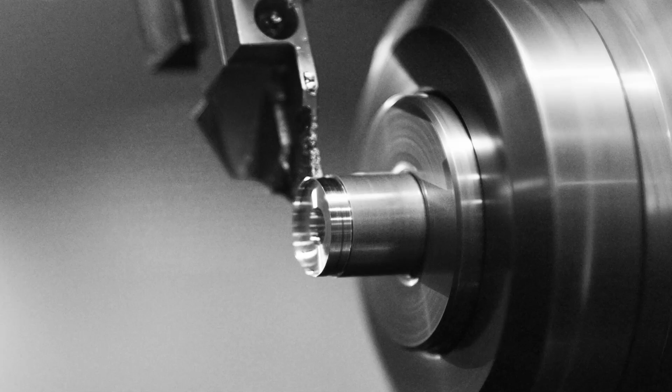Automation and digital thread. We're here with Hexagon to find out more about these key concepts and how they can help improve productivity within your organisation. So Matt, let's start with automation.

Thanks, Lindsay. I think automation is obviously a key critical term within the industry a lot at the moment, and what we often get asked by customers is what principles we really need to understand to adopt this properly. So what we've tried to do is break this down into a series of key overview ideas.

Hopefully people can adopt these to help them on that journey towards automation. In terms of these key considerations for automation, the first one we encourage everybody to think about is streamlining repetition. What are the labour-hungry elements of your process that you're wasting an awful lot of time on right now, where you're doing pretty much the same thing every time?

Now, when we talk about repetition, sometimes it might be in slightly different ways. So you want some kind of flexible automation that is going to take care of the 80% of your job that's causing you grief every day.

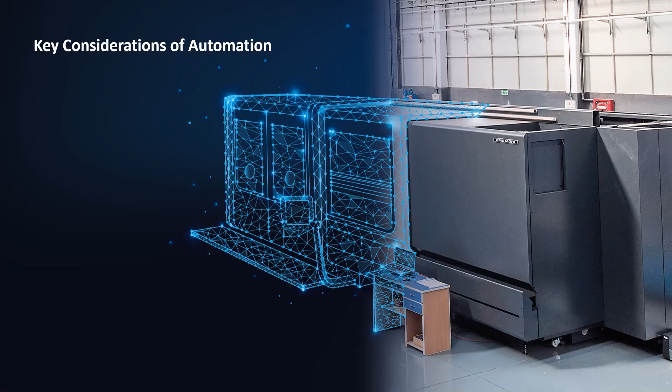Quite often we speak to people and they say, I'm concerned about automation, is it going to de-skill the job? Actually, our findings are completely opposite. Automation is about making the most of the key skills you have and applying them to the really complex concepts that you need that expertise for.

As a third point, I think this is a common concept and something that we often forget: short-term pain, long-term gain. You've got to be committed to putting in that work up front to deliver automation because you truly believe in what it's going to give you in the long term.

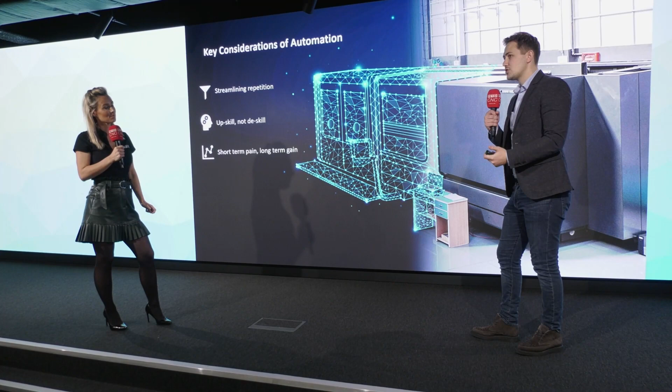If the first time you encounter a problem you slip back to your old methodology, the concepts of automation are not going to work for you. You've got to have a long-term vision of what you want to achieve.

Fourth, flexibility and agility. As we've spoken about previously, the world is becoming more nuanced and more heterogeneous, and people need to have greater agility to be able to adapt to a greater variability of scenarios.

So what's important with your automation is that it's not rigid. A rigid process is doomed to fail in the next phase of industrial revolution. So what you need is dynamic automation that can adapt to the scenario put in front of it and learn on the fly.

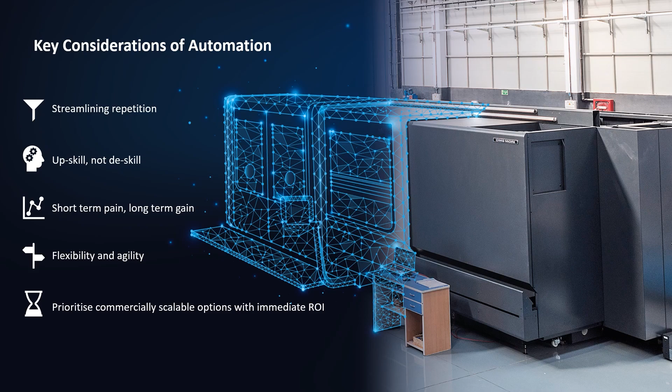And finally, I think this point will appeal to the CFOs out there. We've got to make sure that your automation is commercially scalable. What we mean by that is don't invest millions of pounds on a concept that might take 5 years to see any kind of payback.

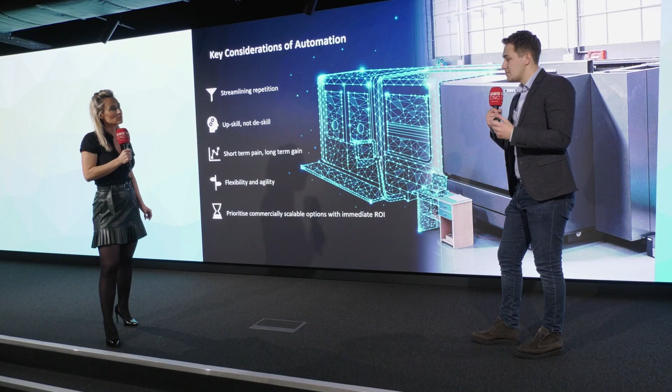What you want to be doing is picking on elements of the process that can obviously be connected together but can start paying back very, very quickly and scale up from there. It's great to share success stories within your business early, and if you can pick areas where you can deliver an element of automation and then scale from there, you're going to create a real good feeling within your business.

Right, next then, digital thread. Indeed. When we talk about the digital thread, there are two main phases to this.

I think the first thing we've got to really hammer home to people is that you must have a digital thread in place now. As we're heading into 2021, this is a real key, critical concept. And a phase one digital thread is something that every customer should have.

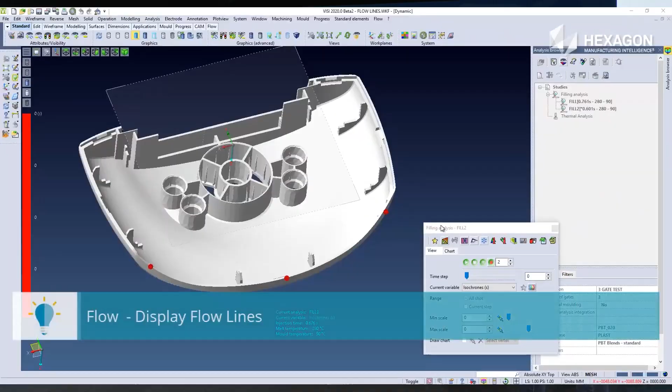So what you can see behind us is what we consider to be a production software digital thread for the mould and die industry. So our Visi CAD solution, which gives you full mould design functionality, polymer flow analysis. Our WORKNC CAM product, which is fantastic for 5-axis mould work. And finally, our NCSIMUL product for G-code simulation.

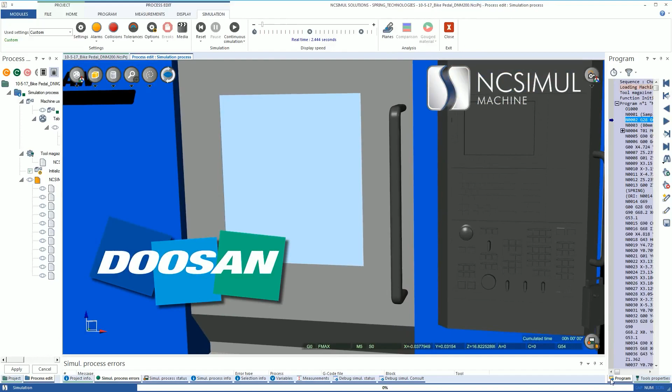Now, this is what we would call a traditional linear digital thread. This is something all customers should have in place already, regardless of their vendor, where you've got a clear process for your data to flow through, so there's no breaks in the chain. From the moment you take CAD data to your finished component, you've got this clear digital line running throughout your business, which creates greater continuity in your data, easier automation, and just a cleaner process in the business.

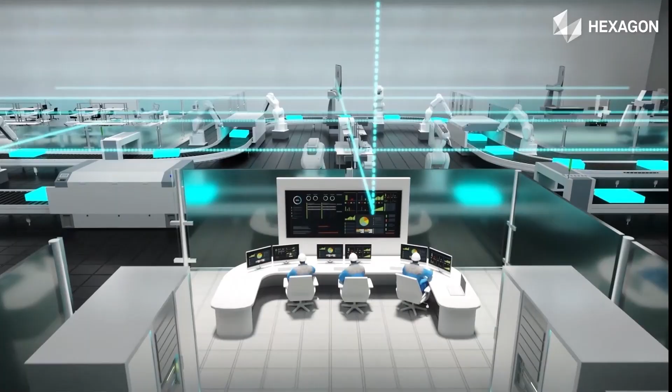However, what we are starting to see as time goes on is a real evolution of the understanding of digital thread. Our linear model, as we looked at before, can sometimes be misadopted by customers, and what we see is a rigidity of process where people take on a concept that lodges them into a fixed process, and then they have no agility. As we've talked about before, the customer is becoming more demanding in the nuances they want from you. So what's really important is that you evolve your digital thread into a 360-degree vision, spokes in the wheel, where rather than having to follow your process end to end, you can step into that process at any point in the chain and have connectivity.

And as we see, this allows us to evolve that one step further into this concept of a true 360-degree digital thread through design and engineering, production and manufacturing, and quality and inspection. So suddenly you have this idea that your data connects throughout your full process, but also you're then able to really understand the value of that data and plug it back into your business.

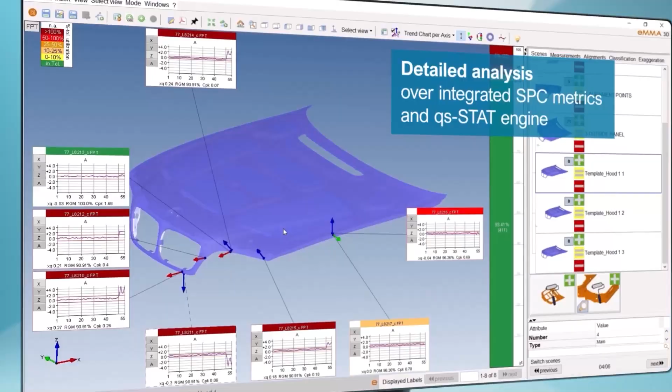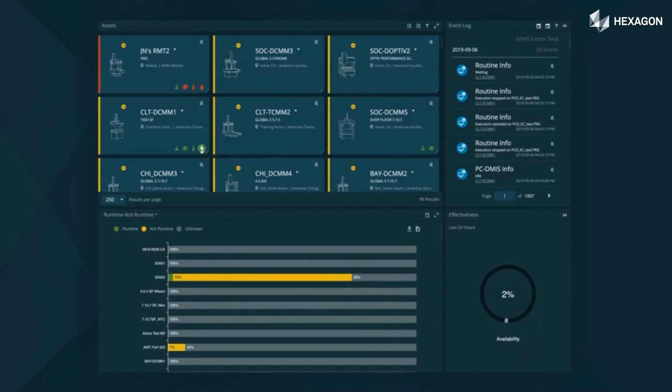So to explain this a little further, once you have this kind of three-pronged circle of process, you're able to manage that process far better. You've got an agile process management platform that fits around that process to manage it. And then, taking this one step further, it allows you to properly manage quality through statistical process control, products like QDAS. And finally, when you plug in products like SFX, our cloud-based asset management solution, you're able to achieve real-time visibility over exactly what's happening in your factory.

And who are all these key concepts aimed at? Who can take on board all of this? I think we are talking about quite conceptual stuff here, Lindsay, and apologies if I've lost anybody along the way, but realistically this is pitched at people who've got these big challenges to deal with, who are looking at how they manage production from end to end, how they're going to prepare their company for a digital future. And really, this is the kind of thing we're encouraging people to do. It's not about individual point solutions. It's about looking at your process end to end and creating this digital ecosystem within your business that's going to allow you to manage productivity, quality and agility end to end.